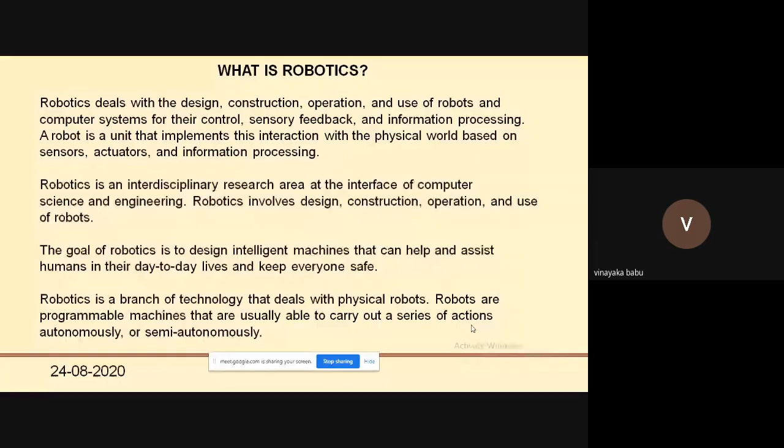The third law is that robots must protect their own existence, except where it could conflict with the first or second law. This third law again relates back to the first law. So this is about the first slide which I'm talking about - the autonomous - and I'll just leave these things for you to read. I just gave a brief overview.

Many people claim this was published in 1920, where you see the word robot was 'robota', which means slave or servant in different terminologies. Basically, robots are supposed to listen to you and execute certain tasks, meeting our expectations to do all kinds of tasks.

There are many types of robots: mobile robot, rolling robot, walking robot, stationary robot, autonomous robot, and remote control robots. There are many types of robots.

When I say mobile robots, the term mobile itself means moving around. Rolling robots have precise dimensions, and walking robots handle certain tasks. Stationary robots, like some machinery, sit on one stand, using its own intelligence, detecting things through a camera, and performing the task.

Remote control robots sit at some place, and through IoT or cloud, you give instructions to these robots, and they listen to you and execute those tasks from far off.

There are a lot of challenges in robotics too. Most people assume robots look like humans, but interestingly, making a robot that looks like a human is probably the most difficult, with Sophia being a notable example. It is a very sensible thing to model a robot after a human being.

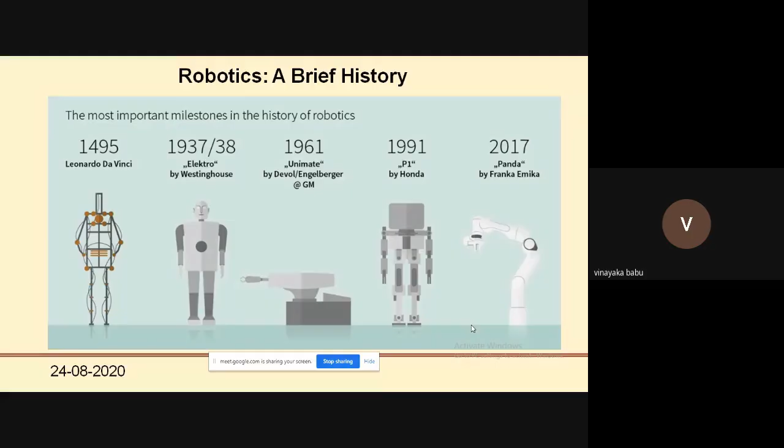This is the history of robots, starting from a very old skeleton to advanced versions in 2017. I'll leave it to you people to go through this. In the morning session, you also came across a lot of videos where sir presented similar material.

These robots come in different shapes and sizes. They are all automatically operated machines which replace human effort. Basically, what we're trying to do is reduce manpower, while at the same time achieving accuracy and having a person work 24/7 in a plant and machinery, where throughput means the output.

Output means the throughput is nothing but the results - like I want 100% result, that's what we call throughput. It could be speed - in electronics we call it speed or data transmission, we always refer to throughput. When we talk of machineries, we talk of output - what is the efficiency of these systems?

With robots, you can expect 99.99% to 100% results unless there's some malfunction, a virus that has affected the system, or a machine or motor getting stuck - that's where you can see some errors. Otherwise, robots are up to the mark of mankind's expectations of what you want to deliver. This is one example of something that can perform a complex series of actions automatically.

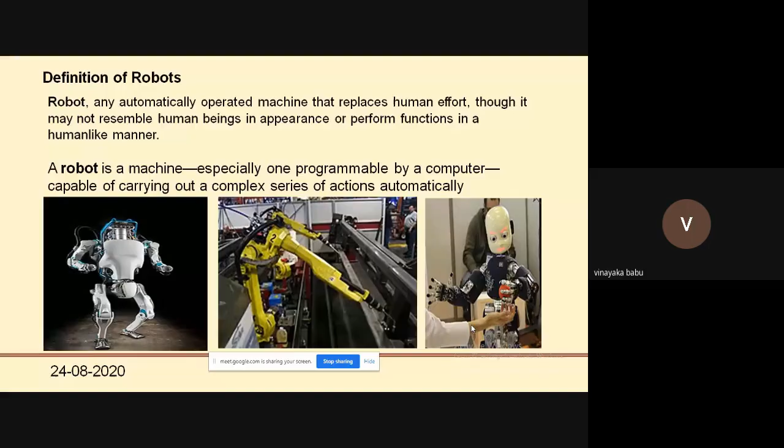These are some of the series displayed here, in machinery where your hand or finger may get cut, like in a drilling machine. These accidents are usually seen in plants and machineries. In robots, it's not the case - it's just one metal hitting another metal, so it doesn't harm. That way you're safe enough to use these type of things.

When it comes to the definition of robots, they involve computer systems and sensors. We'll just talk in brief about robots - what are these robots we've been talking about since morning? Let me go a little deeper into how we can develop robots within the space given in a college.

Most robots use stepper motors, servo motors, or any kind of motors to rotate or drive. Each pulse can have divisions like A, B, C, D - if I say four divisions, this is probably part of your syllabus, so I assume you've gone through stepper motors. In stepper motors you can achieve 360 degrees, or even beyond that. You can divide further, from unipolar to bipolar, with stepper motors.

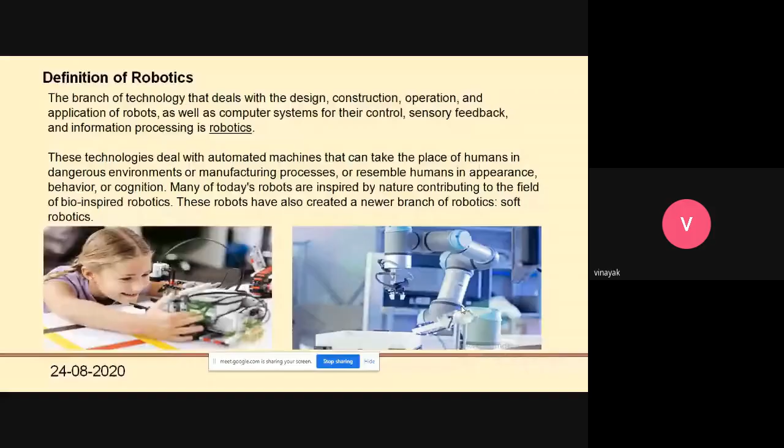Now, talking about this, we'll talk a little bit about types of robots, how the robots are built. So far I was talking about how the robots can be built. These are some things which can be used as movable, which can be used as tankers in defense, or it can be used at home, or it can be used in a typical situation in the farming land.

But for a college and for faculties, I would recommend go for an ultrasonic sensor which is less than 200 rupees.

Yes sir, any questions? Hello? No sir, hello, probably no. You can continue. Are you audible, sir? Are you able to listen to me, sir? Yes, yes sir, perfectly, your voice is much clear. Sir, Vinayaka sir, yes sir, we have one question for you.

How do we check the resistance of the human body? How can you check? There are some meters where you can check this thing.

I don't know if you've heard of earth measuring equipment. Have you heard of oil companies like ONGC? Usually these oil companies have this earth measuring equipment.

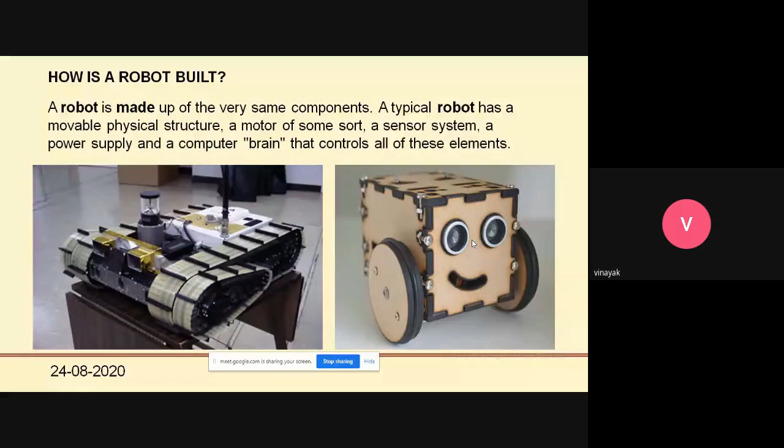I think some movies have demonstrated about that also - the movie is called Robot. So these are all something called co-robots, or cobots, or collaborative robots. These robots are becoming very important, and they are growing in numbers. What are these cobots? They work together with humans to produce a process over the longer term.

And these are all just like a similar kind of person where it can help you in industry - it could be collaborative. These are all more flexible and easier to program. When I say easier to program, these robots are kind of like - I have set a program to count some numbers, and suddenly I want the same robot to do some other task. At that time, these robots can be easily reprogrammed. By using a simple microcontroller, you can just do these tasks, and in some places it can replace the robots also. These are all called cobots - cobots are getting very popular.

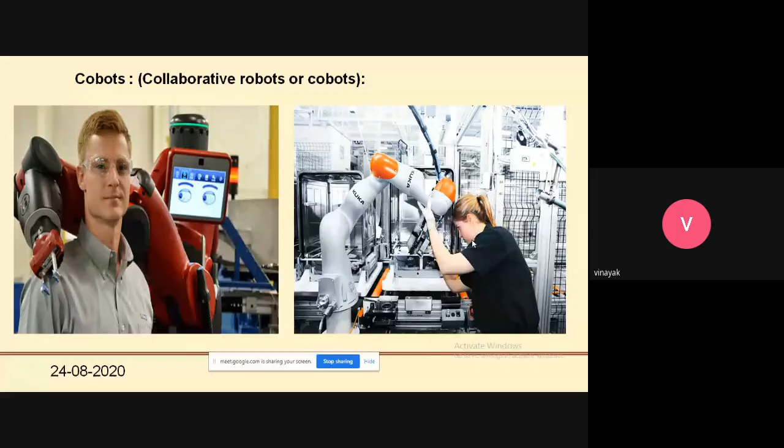And there are some industrial robots. Industrial robots, again, I'm talking about the same robots, different size, different form factors, different places. If I use it at home, it's called different. If I'm using it on the field, it's different. If I'm using it in industry, these are all industrial robots. But basically the robots are the same in nature - how you program, how you control, how you work around with this type of system.

General Motors, probably most of the car manufacturers today, they are using robots. These are all stationary robots, where the precision is more important.

The good part why they use them in the automobile industry is basically safety reasons, because in the past there are many accidents which may not have popped up in the newspapers or the media, but in a machinery plant it is obvious that in a given month or year there could be 5 to 6 incidents happening. It's not good - suddenly a guy loses his hand or a leg. Of course you have incidents and all those things, but predominantly the human values have some importance. Rather, I allow a robot to do the job which is very critical and very sensitive, rather than human beings, to monitor them and get things done.

So you could have used CNC machines. Today there are CNC machines in BHEL and many places. They use the CNC machines to assemble the motors - they pick and place, with predefined nuts and bolts, and it picks up the nuts and bolts and fixes the motor, and it does it by itself. And there's a lot of automation going on.

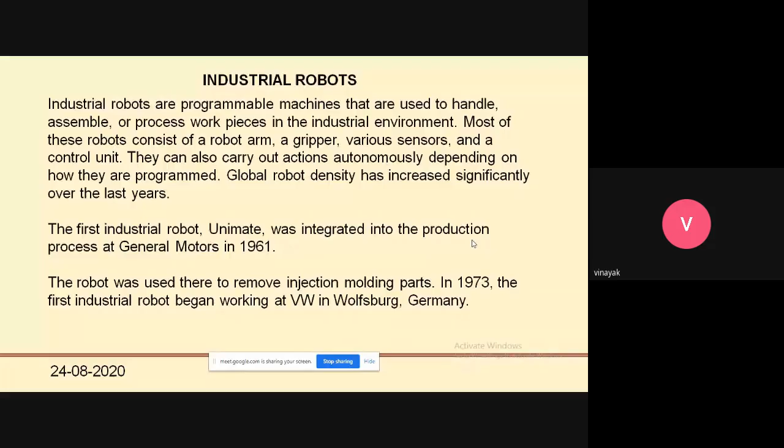And this, I'll just leave it to you - the 1973 first robot and all those things. This is the manipulator and end effector. What is a manipulator? It's just like an arm, a human arm. So when I talk of a human arm, where it can be...

precisely used, I'll tell you one application in defense where an army person has to carry his bag. Let's say he's carrying a bag of his own things, could be his own luggage, and along with it he has to carry the tent, and probably some telemetry gadgets. Now if you look at the weight, these weights are somewhere around 15 kgs to 20 kgs.

Average weight of a human body, for someone in the defense sector, could be somewhere around 60 to 70 kg. But carrying a weight of 15 kgs on his back, you can probably walk for 1 kilometer, not beyond that - maybe 2, maybe 3. But in a defense environment, if you are asked to walk for 10 kilometers, it's very, very difficult.

At that time, what they use is - the suggestion is, you can fix it to your leg, your arm, and your backpack. How does it work? You just press it and all the weight gets transferred to the ground. So you have a little bit of movement and you can carry 20 kgs even for 5 kilometers or 10 kilometers you can walk.

So that way the human body will not have too much stress, or basically body pain or the weight on your body. Basically the load is transferred to the ground, so that way you can easily walk around. So this is a very good application where any of your college faculties can work on this and develop it, and you can give it as a project.

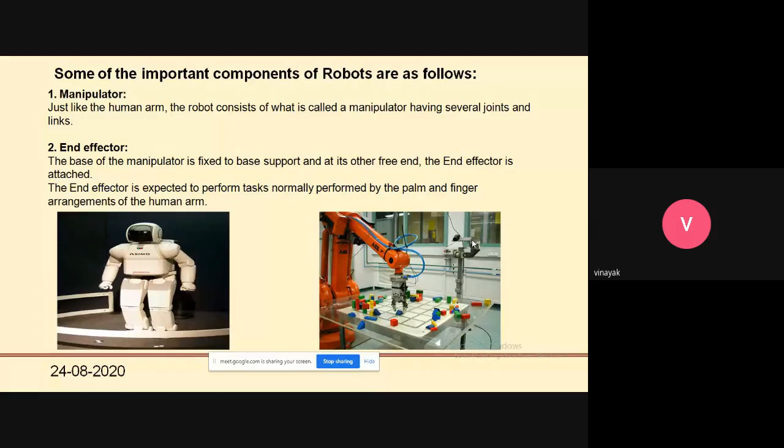Then there is a locomotive device, controller, sensors. These are all basically used in power plants like electric, hydraulic, pneumatic controls. Pneumatic control is a big area of scope. So when I'm talking about all these things in robotics, you can see the scope of robotics in coming days, how it can predominantly play a major role and help human life or human style of living. The controllers are digital computers with hardware and software which can control the robots with the assigned task, and it goes back to manipulators and effectors.

The next one is sensors. I think we talked enough about sensors, the sense organs. This is one area in sensors, basically MEMS - micro electro-mechanical systems - which has got a lot of scope in coming days. What are these scopes? It could be pressure, air, light, fire, some gaseous things, or lot of other sensors. We have still not come across all of them; we have yet to do some research on those areas.

Some of them are available, I don't deny it, but still it is not sufficient to build the kind of robot we are expecting in today's world. A human body has got multiple things you want to try to replicate on the robot, and sensors play a major role. If the sensor doesn't work properly, the robot cannot do anything.

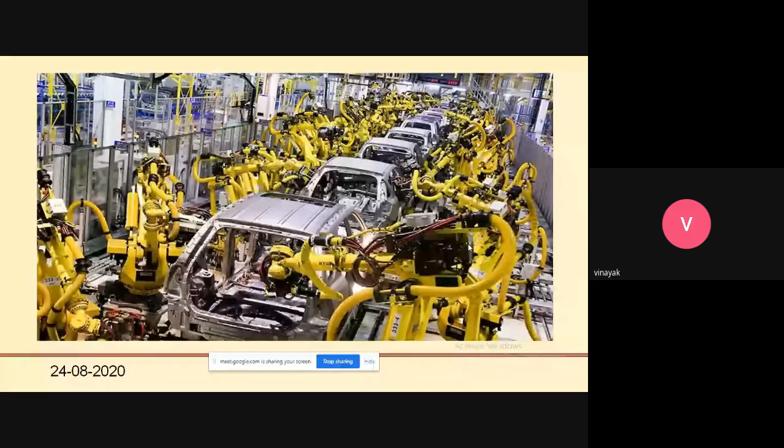Today the robots are in different form fit factors. If you go to Google, there is annotation where when I'm talking, it can capture the words. The same thing can be built into robots, and what I'm talking, it can understand. You can go to Google and search and ask, but the problem with Google or these types of things is, if I ask one question, there could be multiple answers. The picking is very, very difficult.

So then the robots have a challenge to make a decision. Is he talking in this sense? I am going to dash. What is this 'dash'? The robot has to digest it. Is he going to office? Is he going to hotel? Or is he going to theater?

I'll be coming back - so the robot has to gauge what time. Usually what time predominantly comes from his history, so it has to look back to his history and calculate. Until you finish the sentence, the robot has to ask a question: what time are you coming? Then you may have to respond and give the precise time. If you don't maintain the time, the robot will still do its task. So that's again a headache.

These are all challenges which over a period of time, I think, will be taken over with a more precise solution, meaning there could be some options with leeway. What I mean is there could be a mobile phone where you can send a message to a robot saying, hey, just like your wife, I'm coming late by 7:30 or 7:45. So she's alert, or you're at the door and say I'm coming late, I don't know what time I'll be there, so you be active so you can open the door or do whatever activities - prepare the kitchen, or have food ready late night, whatever you want the home robot to do for you.

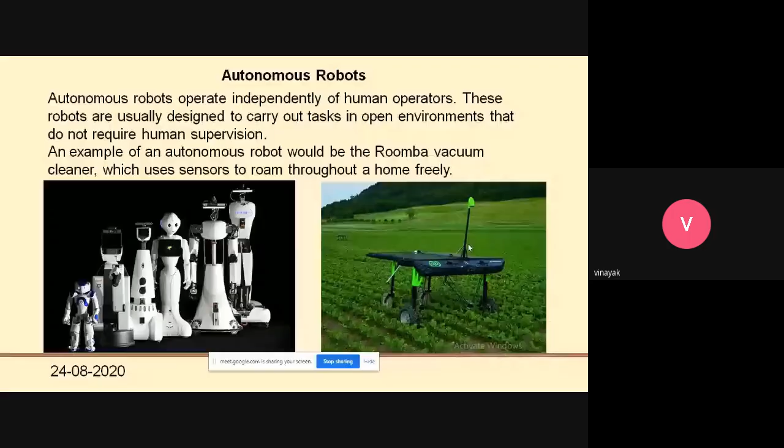So this is Sophia, I think you would have seen most of it in the morning session also. Similar to that, these are all robots which can be used at home appliances for cleaning or any of your activities. And then you have teleoperated robots, which are used for teleoperation. I think it's already there, teleoperated - we're just not aware of it.

If you ask, like your cell phone answers today about COVID - there are some self-operated instructions that come to you, right? Close your mask, face, all those things. Similarly, there could be programmed robots used in call centers: press one to do this, press two to do this. All these things can be done with robots, or it can divert those calls. If it's very important, it can route to the concerned level 2 or level 3, whatever it is.

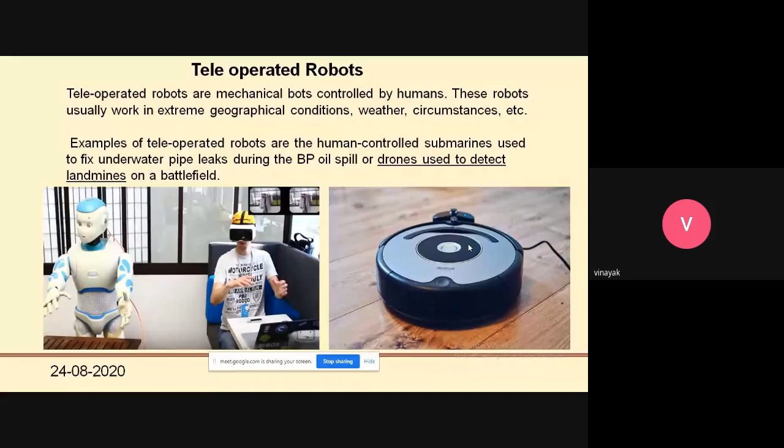So there are some drones - I think probably they're used in landmines to detect what they call things in the battlefield. Also, these are basically magnetic in nature, so these are all metal objects which can detect. If there is an object, it will detect and give the signals to the concerned person. So these are all augmenting robots which enhance human capabilities, replacing the human.

This is self-explanatory, an exoskeleton which you use to lift heavy weights. If you see this arm right here, he's taking some weight and it can be transferred to the leg. All these type of activities can be done in coming days.

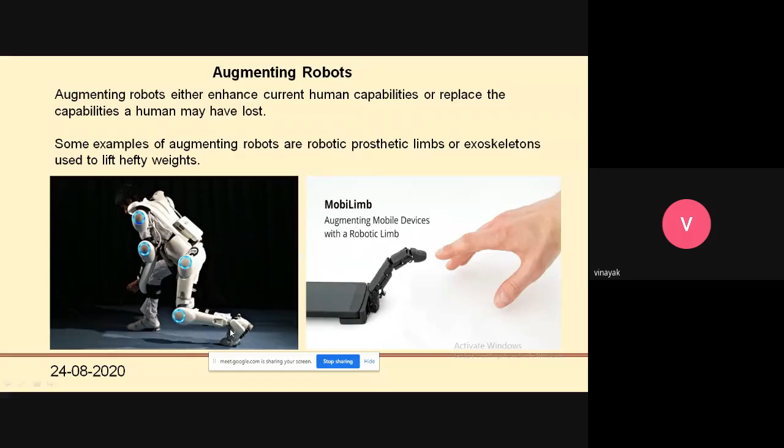So there's a lot of activity going on with robots. Many companies are working on robots. Probably everybody wants less human intervention, so the decision making is very easy for the bosses. Like, do what I say.

This is a common term in MNC companies or in most industries. What I've seen in the past, the only common phrase in MNC companies is, do what I say. Sir, I want to do this. No, no, no, don't put your thoughts into it. Do what we say, that's all it is.

So basically they're expecting a human robot there. Probably I would prefer a robot to do that job, because if you bring intelligence to it, yes it is good, but that will disrupt my system.

Sir, instead of doing this, why don't you do this? Yes, there is a system already in place doing this job. If you disrupt it, the whole mechanism can change, the whole life cycle can get changed. So most industries don't want to get disrupted, they don't want to change the system. As long as it affects it, a small change in an industry can bring a huge loss.

I don't want to mention the company, but this automotive company engineer was very technically sound. He wanted to bring some change, but the management rejected it. He said these are advantages, it's so nice, it's good, you are intelligent, but that will disrupt my system because they have put a lot of money in media, advertisement, a lot of stuff. This one small thing without notice could be a version 2 or version 3, but they don't want those things. So again, he was put back on the backseat, all politics there. Anyway, we don't want to get into that, but these things are very much predominant, robots are preferred.

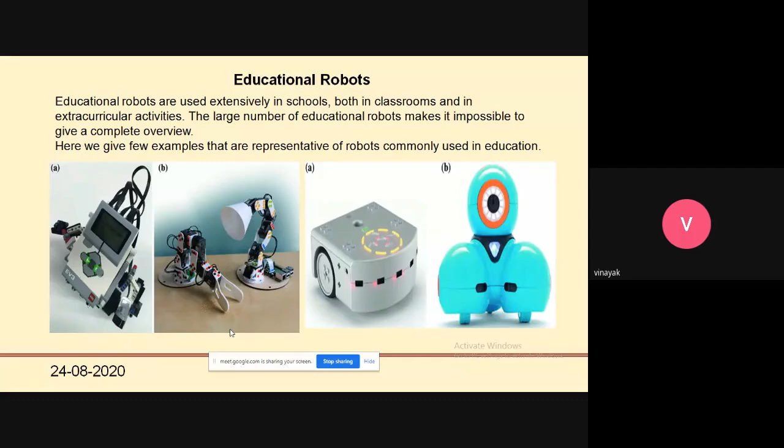So these things, I can't call a robot, those days they call it a gadget. Today these gadgets, having some intelligence and the ability to move around, can be called education robots. So again and again we are coming back with that intelligence, building these type of hardware equipment.

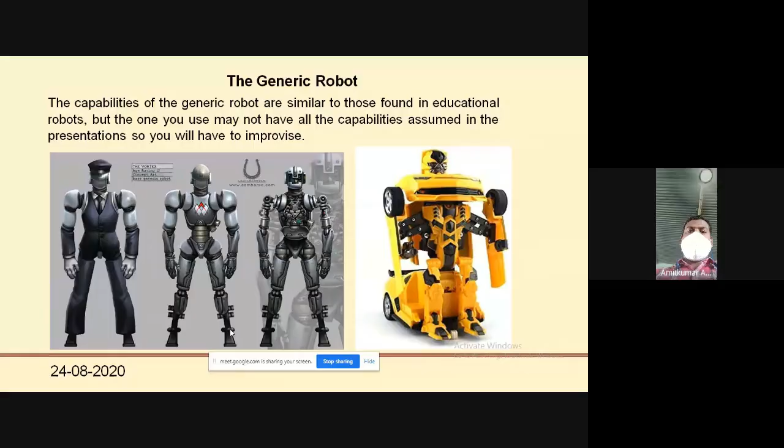Probably there could be a lot of developments in nano robots. It can be miniature in size and do very small jobs. Probably there is a pipe where you have oil leakage or it could be stuck. You can use these type of robots to go inside, detect these things, and give feedback, or do some task or cleaning job or other tasks. It could be in a body, in a tank, or in a pipe, or any other environment where people cannot enter.

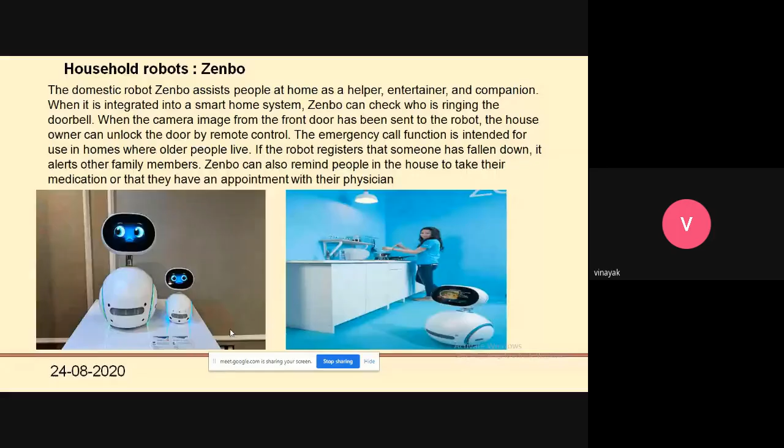It could be a mine, it could be some kind of critical application. It can use this type. Then you have household robots which are used for cleaning, serving you all the time. This is a company already in the market. There are a lot of Japanese companies already invested a lot of time in these type of robots.

So there are some software robots also, computer programs, autonomous meaning independent, and there will be a virtual task also. These are all search engine bots, web crawlers. A lot of activities are going on in this area. And there is some chat bot. I talked about Amazon, the machine-to-machine interface, where it started chatting with each other. So I gave some examples there also.

So these are all something related to neural network, artificial intelligence. There are some neural chipsets which Toshiba developed long time back. At that time they blocked it for some reasons. Today, predominantly, the whole world is looking towards that again. So probably a lot of work is going on with those neural chipsets, which Toshiba started working on way back. I don't know how far other companies are working on it, but I'm sure there are many more companies working in these areas.

To bring flexi PCBs - flexi PCBs already in the market, which can be embedded in your body. In coming days, you don't have to carry your identity. Those identities can be built into your body with chipsets, where it can carry the complete database. And already in Israel, if you go, you don't have to carry a passport if you're a resident of Israel.

You just enter the airport. You have your fingerprint, iris with eye detection, and facial recognition, and with your fingers it will always allow you. You have a separate lane for them, and they can just walk in. So you don't have to go through the check-in process. So those things are already coming in place.

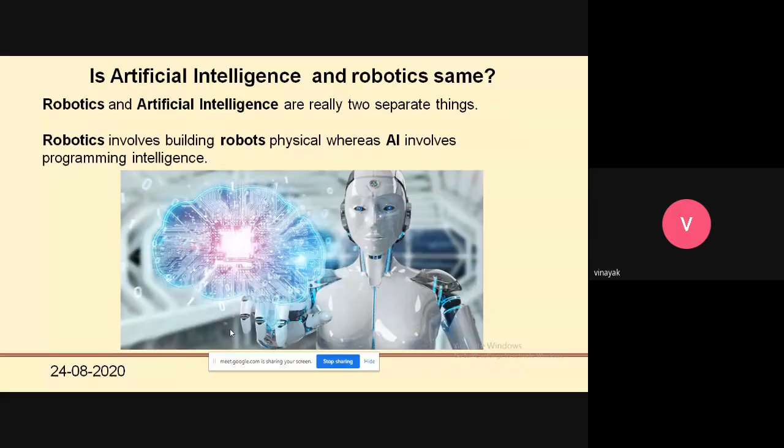So today we are talking more of robots. They can be used in manufacturing, logistics, home, travel, healthcare. These are all upcoming robots which can be used. So this is the aspect of life. This is how, in coming days, as such we have isolated ourselves.

In a nutshell, in conclusion, what I can say is robots are working for the people. Probably we have built the robots and they will be working for us in the industries, factories, warehouses, laboratories. Useful in many ways. It can boost the economy because of the business models which are efficient today. We are talking of more precision.

If you want to compete - today morning a minister was talking about it - so if you want to export more rather than import, as such we are importing. We are a country where we import a lot, in billions, but our export is not that much, not even 20% in electronics. It's predominantly very less. If you want to do more and more, it could be not only electronics, even the farming sector, any sector.

So the precision, the accuracy, the efficiency, the competence level, the quality - a lot of things come into picture. Somewhere we are falling short in this category, and that's where we're not able to meet their expectations or market ourselves in the international market. Robotics can give that efficiency, accuracy, and quality. That will be a key factor for us to boost the economy and grow the export sector much bigger in coming days.